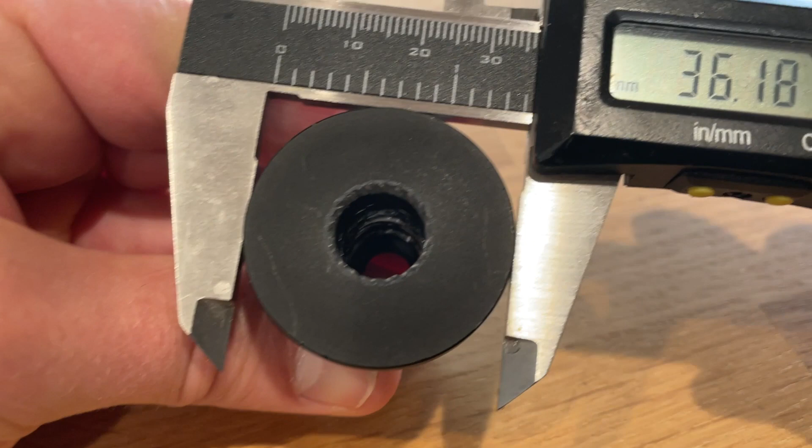Opening Fusion, let's start a new part file. So let's take a look at the existing design, what we should try to build our design off of and improve upon. I think with some calipers and some simple measurements, we should be able to redesign this in Fusion 360. No need to take any photos and calibrate those since there's not a lot of complexity on this particular design. And here are the important steps.

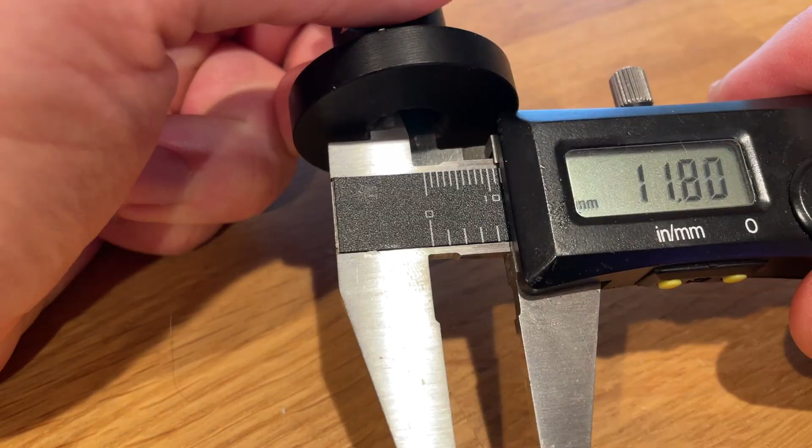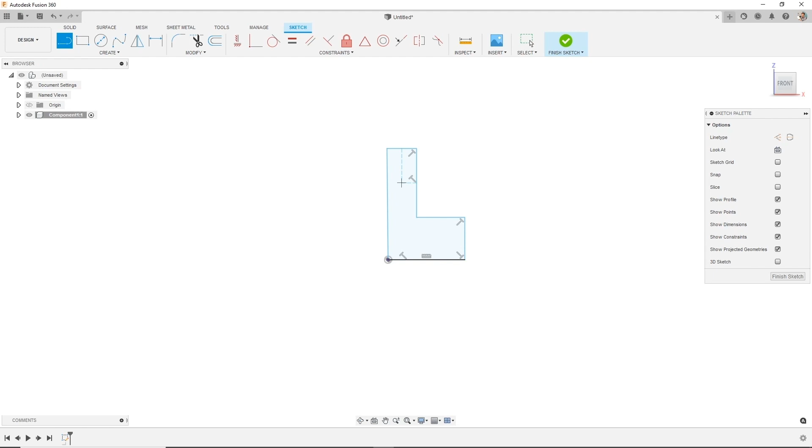You pick your plane, you click sketch, sketch the shape, and you give it depth. First thing is start a sketch on the front plane. What I'm going to do is sketch the rough shape of half of our design. So you can see it's a little bit off. First thing, let's add all the correct constraints. So I'll select this line and make sure it's vertical. And now everything looks good. This is perpendicular. This is horizontal.

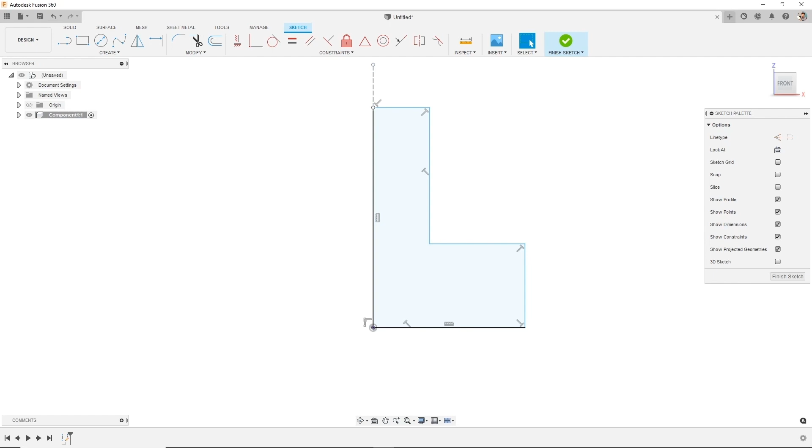Let's add some dimensions. Now, because I know diameters, I could put those in as diameter or as a radius. So I'm going to put a construction line. I sketch a line and turn that into construction by hitting X on the keyboard or right-clicking and choosing construction. Quick tip, dimensions are super helpful to get the right size, but it also makes editing much easier later.

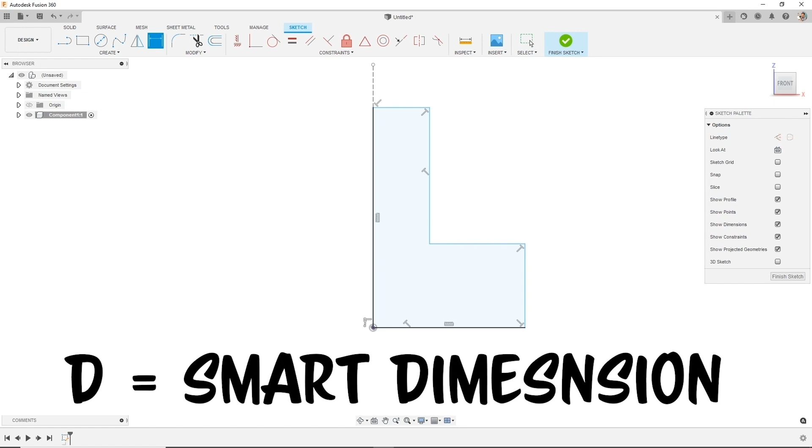So what I want to do now is start to dimension. And I'm going to dimension from the outside line. So I hit D for Smart Dimension from the line to this center line. And when I do that, I can place it and then right-click and choose Diameter. And what that does is it doubles it. And the order is actually sensitive. So you can see I messed up, right? It's doubling from the center outward. That's not what I wanted.

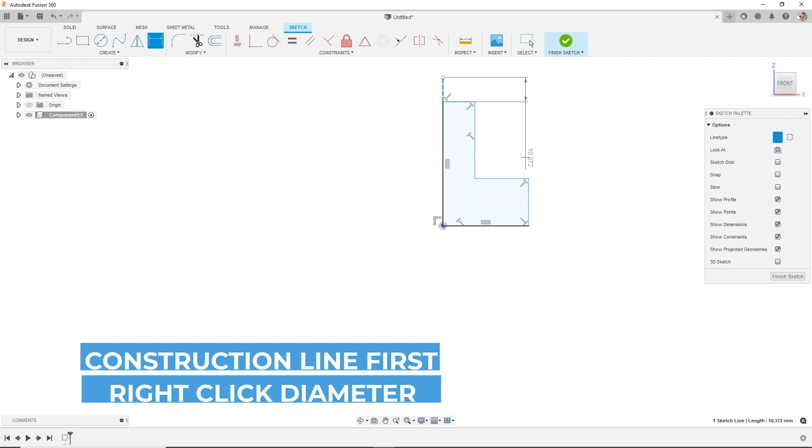But instead, I'll try the center line this time. Center line to the line, right-click, diameter. And now I can double over. That looks much better. And that's the measurement that we took of the mic insert. And it scales everything. Now, one thing you might notice is everything about my sketch just scaled correctly.

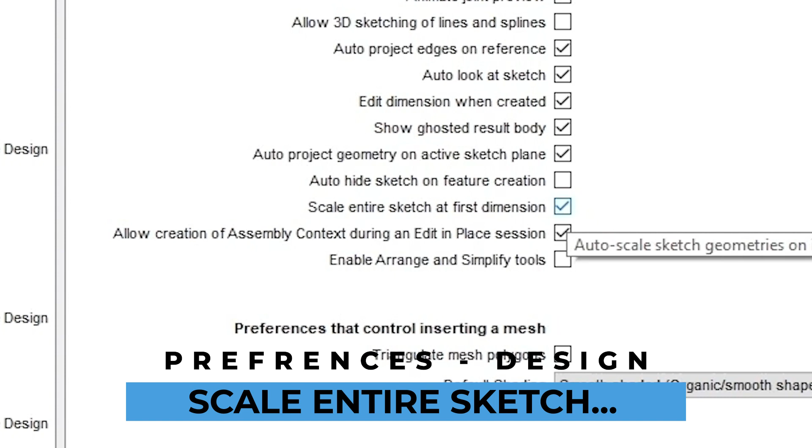And that's because I've got a setting in my preferences. There's scale the entire sketch at the first dimension. I love this setting. I mentioned it in a lot of other videos. This is one of my favorite settings. I always keep this on because I like to sketch everything and then have everything scale correctly once I put on my known dimensions. From the center line to the line, right-click, diameter, and now we've got it doubled.

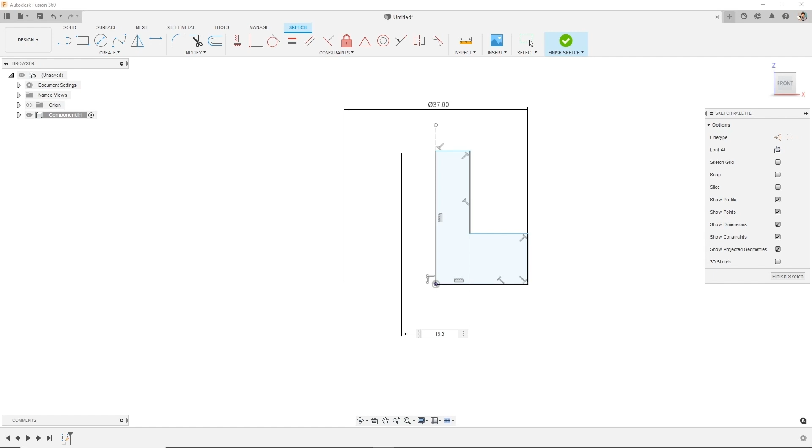So what is the value when we measure that? Mine's about 19.48 millimeters. So maybe I'll go under a little bit because I want it to fit. 19.3 maybe, just under. The overall height is about 37.25. I don't think it's going to make too much difference if this is a little tall or a little short. I don't think this is a critical dimension that would affect the design and fit.

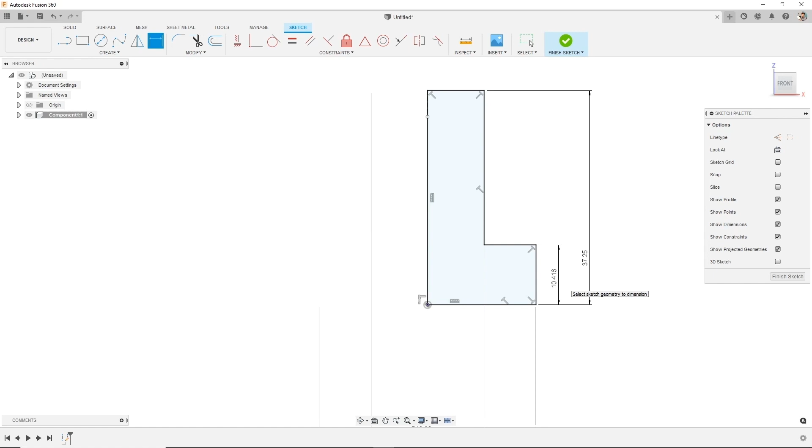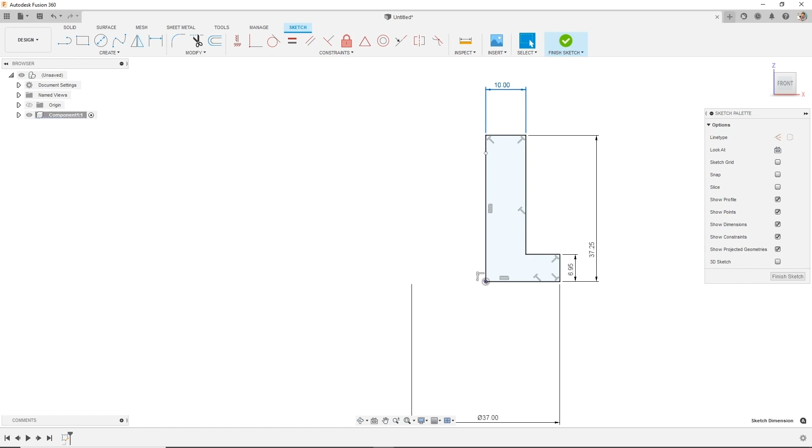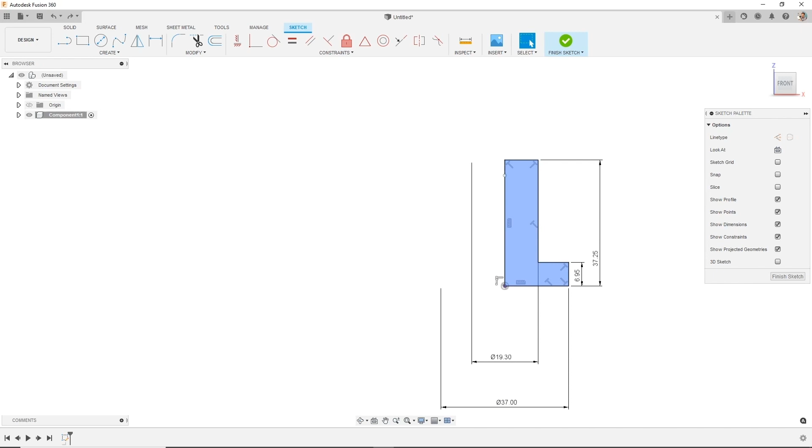Now, this is a Revolve. It's going to spin about 360. Under Solids, find Revolve. Click it. This is the profile that's being turned 360. And now we need to pick an axis. This center line would work great, as well as maybe the axes from the planes would work as well. You can see the preview. It looks good. We're really close.

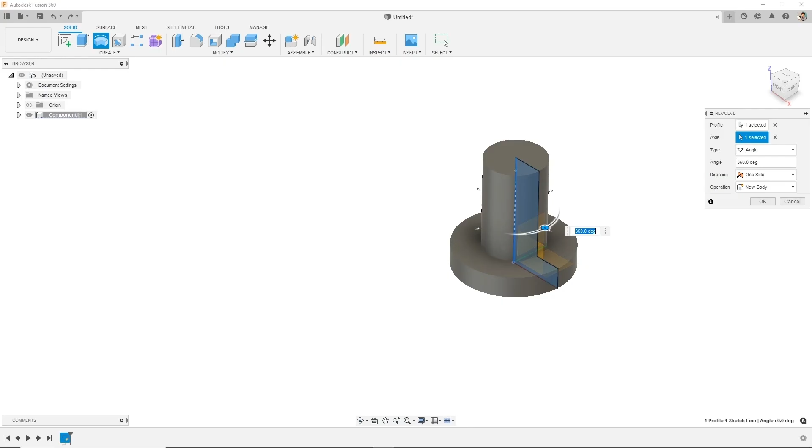Now you might be asking, could we have sketched that hole in the first sketch and just do it all in one sketch? Absolutely, that worked great. And the only reason I didn't was I sometimes like having the cuts separate so that I know how to edit them easier later. I don't have to even go into that sketch. So we're going to do that now.

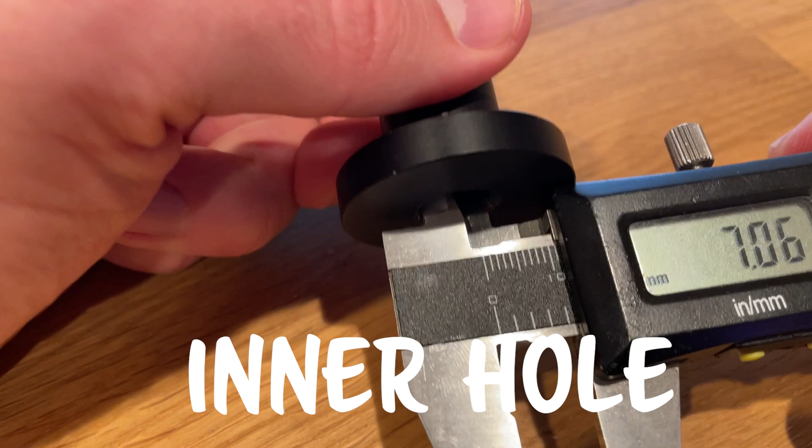And now for that critical measurement of the inner hole, we'll compare that to the boom arm and make sure that we've got plenty of clearance. That's where it's sticking. Select this face, start a sketch, choose sketch. Now sketch the circle by connecting to the center point, dragging out, do D for smart dimension, place that circle diameter, and then put that value in.

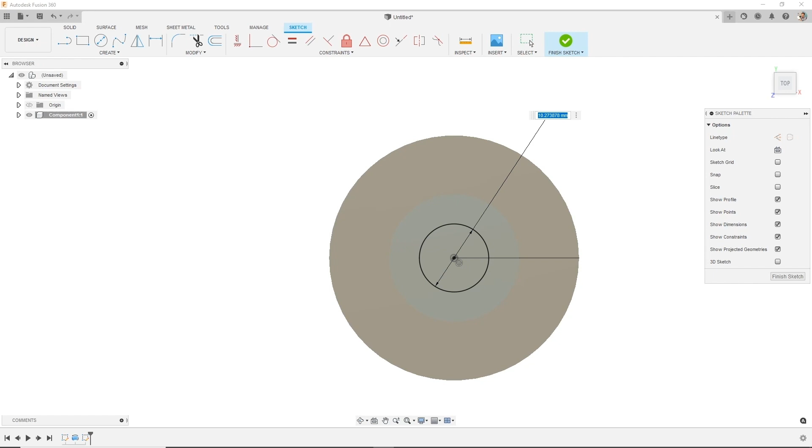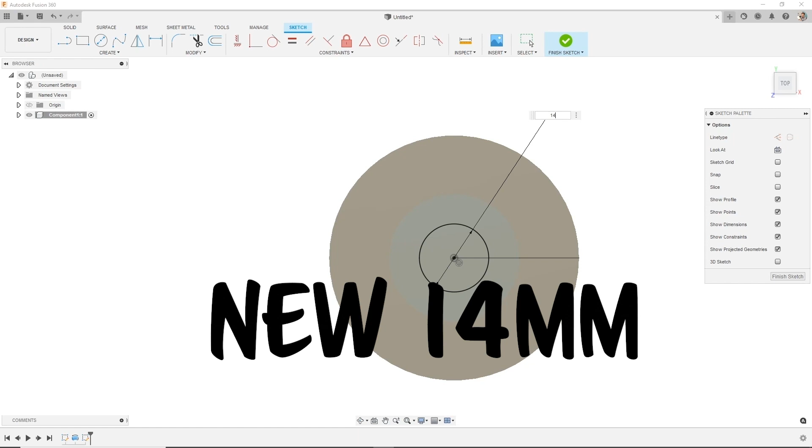Now here's the gotcha. When I measured it, it was roughly 12.28, something like that. So if I do that, that's great, except my hole was too tight for the new mic. That little mic arm or boom, it doesn't fit in there, so we need to go bigger. So let's go all the way up to something like 14. I sketched that hole, and now we're going to extrude the cut all the way through. We can ensure that it goes all the way through by choosing through all.

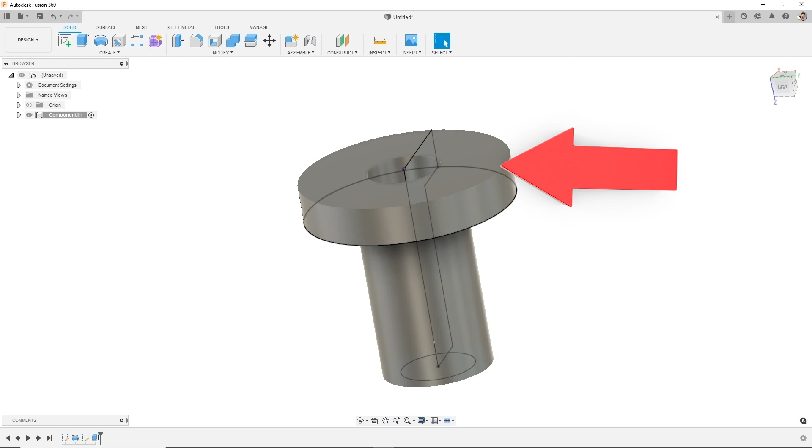Cuts the hole out. Because this is my first iteration, I might not worry about any finishing touches like fillets and rounding corners if I want to do that. I don't have any real serious concerns about strength. As long as I print this nice and stiff, it should hold the weight of the boom arm just fine. It'll be in compression pretty much the whole time.

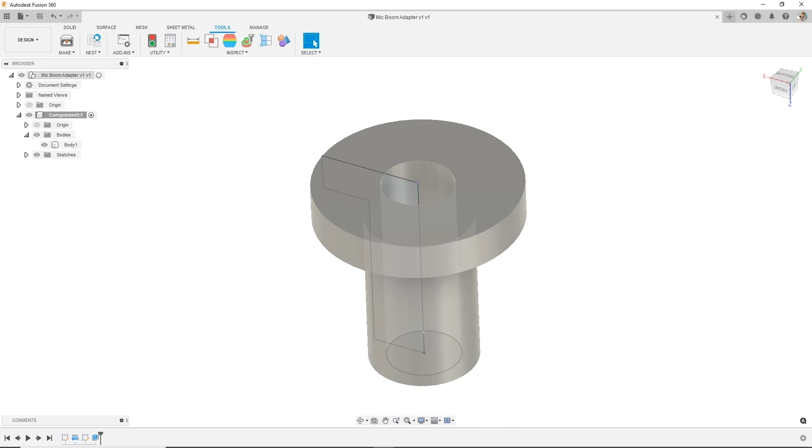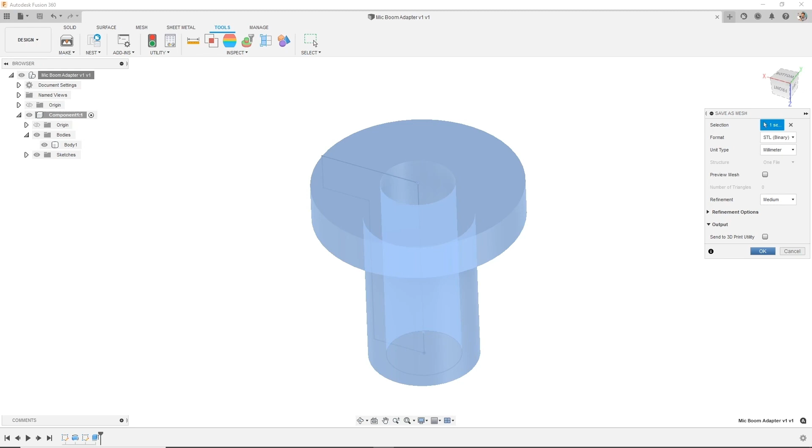Okay, so we save the part, and now let's send it to Cura. In my case, I'm using Cura for my 3D printer. So best way to export the STL? My favorite way, especially when I have multiple bodies or components, and I want them all in one slicer file, I right-click at the top level, choose Save as Mesh. It has that body that I care about selected, and I'm going to send it to an STL. It is in millimeter. Looks great. I'll leave it at the standard refinement, especially for my first version, my first prototype, and save that out.

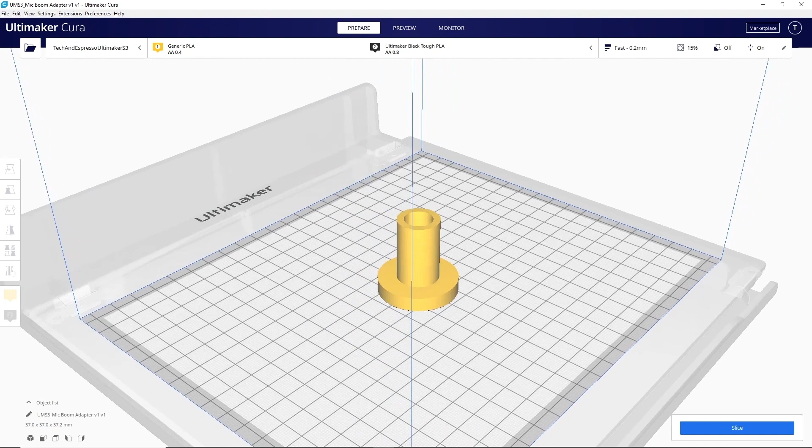I'm going to be sending it to my Ultimaker S3. And I'm going to import that STL that we just had. So this orientation looks really good to me. I wanted to print this against the build plate. I don't expect I should need any supports. There's no significant overhangs, anything I'm worried about for the moment. This looks pretty good. So it's my first draft. Let's give it a shot. I'll slice it. Looks good, about 44 minutes.

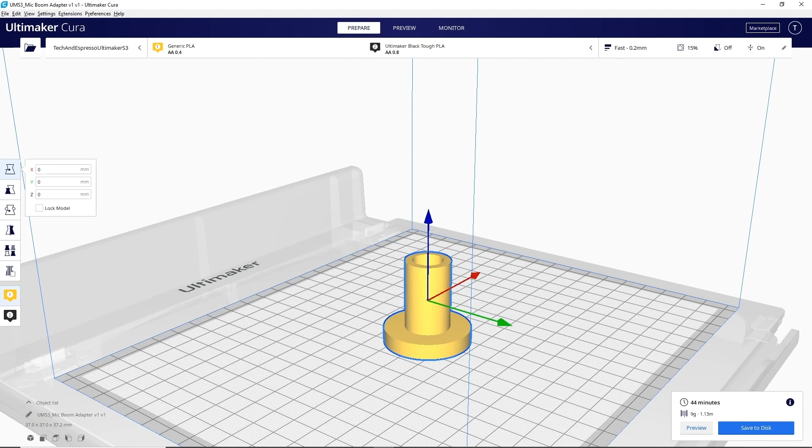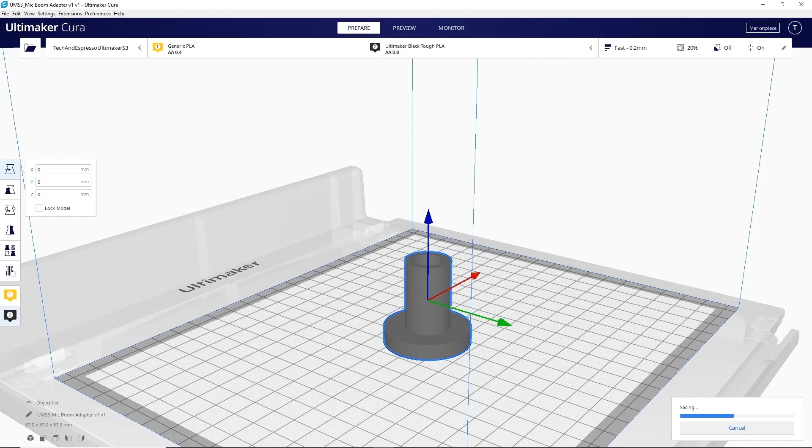And one thing, on my Ultimaker, I actually have set it up to where I have a nice smaller standard nozzle at 0.4, and I have a large nozzle at 0.8, and I love using this one for my prototypes because it's faster, it's a little bit rougher, and sometimes the quality isn't great. Okay, so a few settings that I'm going to just make sure and check. I don't need any supports. I might do a skirt, but I'm definitely not going to do a brim for this one. And I'm going to do the skirt in the same nozzle, same plastic, and same material. When I choose to slice this, let's do a quick preview, make sure everything looks good. About 30 minutes later.

Here's the finished component from the 3D printer. It looks pretty good, maybe some filing on the corners there. It's a little bit rough, but overall, I think this might work. Let's test it out. All right, dropping it, it fits into the hole nicely, and then bringing the boom arm, it seems to fit really well. There's not much slop or play. It does move around as I need it to, but it's nice and tight.